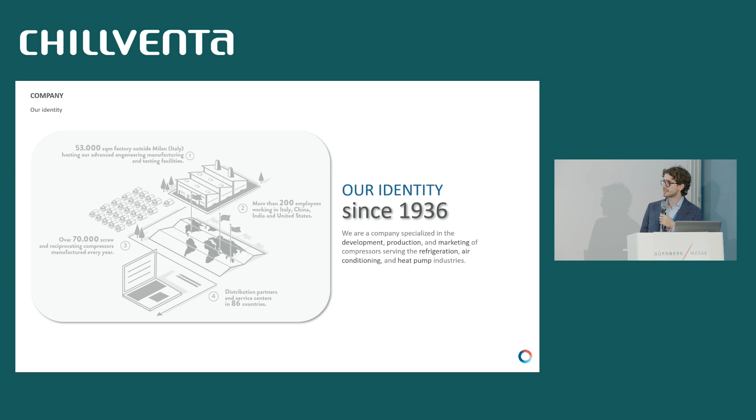We are Frascold, we are compressor manufacturers. We are not only a supplier, but we are also trying to share our experience with customers in the entire customer journey, from the very beginning with the selection of the refrigerant, which nowadays is a big topic, to the very end of the journey.

We have many locations around the world. We try to be where you need us. So we have production facilities not only in Italy, where we have our headquarters, but also in China, an assembly facility in India, and many sales facilities around the world, in the USA, and a new one also in Vietnam.

What is the situation now? In Europe, we are a little bit ahead regarding regulation. We have seen a couple of years ago with the Green Deal this very ambitious goal of net zero by 2050, decarbonizing Europe, with an intermediate target of 55% reduction by 2030. These are very strong commitments from Europe, and it's not easy to reach these limits without proper incentives from policymakers.

At the beginning of this year, they finally took a decision about F-gases, with a strong phase down starting from 2025 and a complete phase out by 2050. And there is also strict regulation about export, so it's not only for our market, but also for export outside Europe.

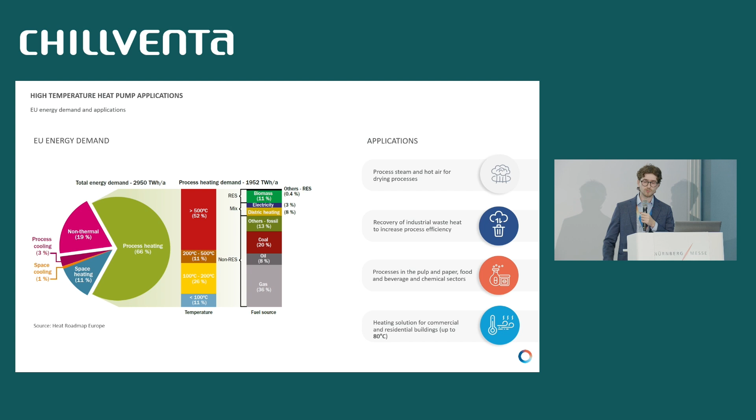So we need to reach in this old residential building the same temperature you reach with the gas boiler with a heat pump. So it's very interesting, this application with propane up to 80 degrees Celsius.

This is a brief overview of the entire range we are developing. We have already developed for the high temperature application. There is a shift from reciprocating to screw compressor based on the size and the capacity that you need. So starting from reciprocating compressor, small reciprocating with 4 cylinders up to 8 cylinders, and switching to screw compressors for displacement up to almost 1,000 cubic meters per hour.

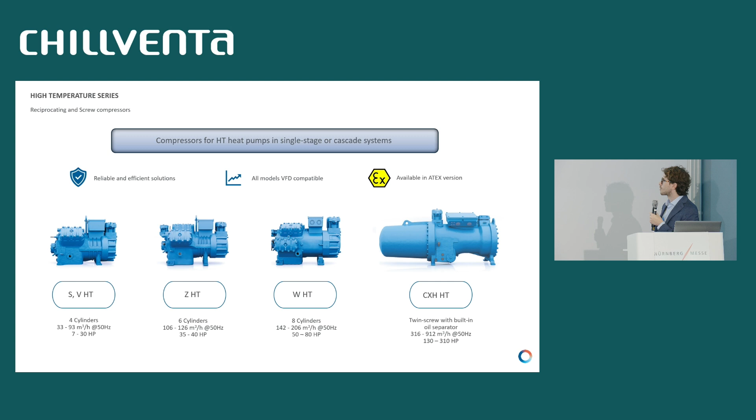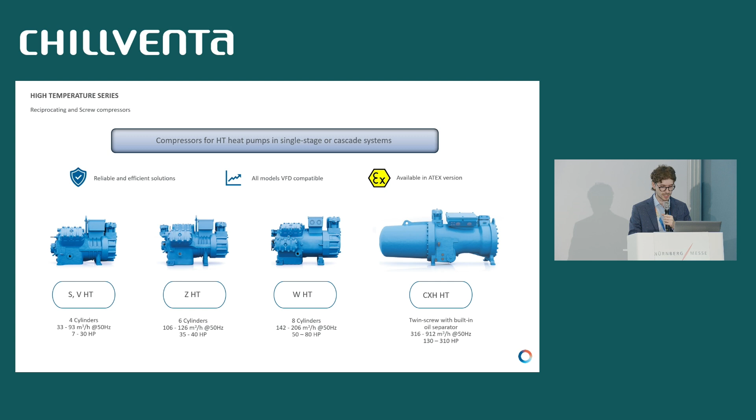So propane up to 65 degrees Celsius leaving fluid temperature, and isobutane, ZD, and special mixtures between hydrocarbons. And what we have now is something even higher, with propane up to 80 degrees Celsius delivering water temperature. Even higher. This is the official limit, but we are still testing above these limits. Isobutane application up to 110 degrees Celsius.

More using different kinds of refrigerant, basically to keep the same pressures as the others. So up to 130 and 140 with isopentane and ZD. This is very interesting because ZD is A1. So for those who are a little bit afraid of flammability, this is a good solution. We don't know in Europe, maybe outside Europe; in the next few years we need to understand if in Europe it could be a feasible solution.

What we have done to reach these new levels, we have modified many of the internal components of the compressor, without changing the shape, because we want to reach these new limits without changing the body of the compressor. We want just to change the compressor without bothering you with system modifications because of bigger components. So what we have changed is everything inside the compressor.

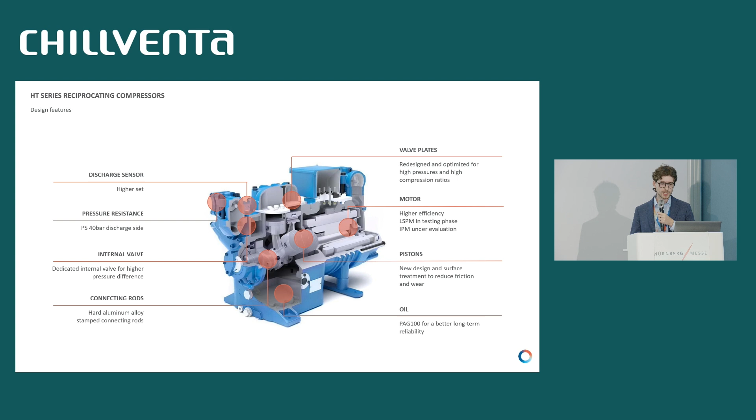We have also changed the standard oil with the objective to withstand this very harsh, burdensome condition due to the high discharge temperature, but also the high pressure. We'll go very quickly. You can find these envelopes already released in our selection software. It's up to 35 degrees Celsius evaporating temperature, and 80 degrees Celsius is the one released; we have tested even more.

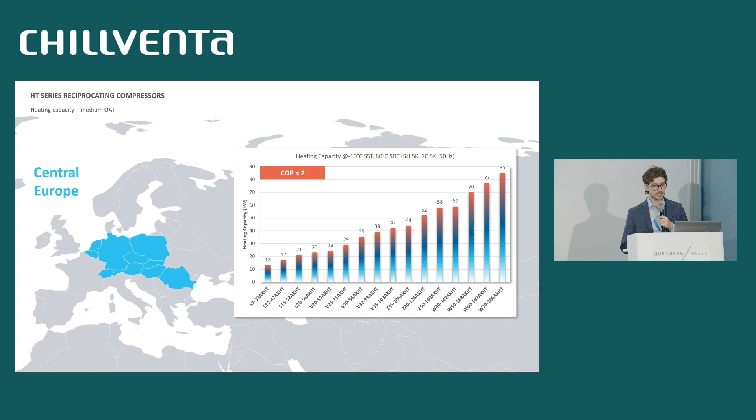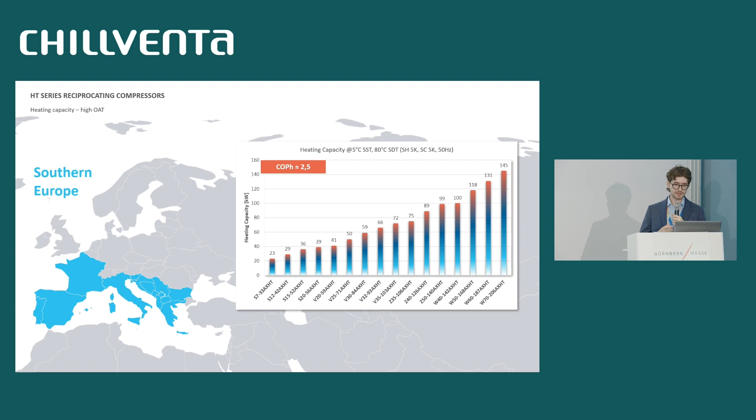This is just to have a reference of the capacities that we can reach, and the COP target with our high temperature series based on the climate. So in Northern Europe, maybe you are more interested in very low outside air temperature, so we can imagine evaporating temperature down to -25. In Central Europe, for example Germany, maybe we are interested in dimensioning with -10 evaporating temperature because of higher outside air temperature. And in Italy, Spain, all these countries with slightly higher outside temperature, 5 degrees Celsius, with the target COP and heating capacity we can obtain.

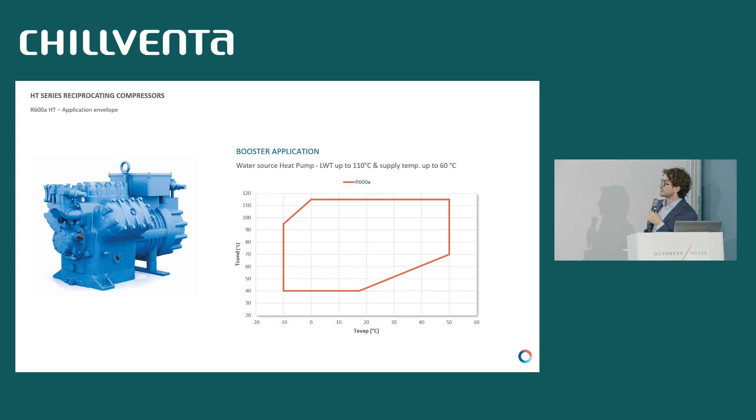And this is a further extension. What we have seen before was the previous limit of isobutane. So if we use this high temperature series, we can extend the previous limit of isobutane up to 115 degrees Celsius condensing temperature and 50 degrees Celsius evaporating temperature. So there are special applications with a very high heating source temperature. But it's very interesting, and there is a lot of demand related to this application.

Switching to screw compressor. In this case, we are interested in even higher capacity. Again, what we had until a couple of years ago was a screw compressor for propane, for example, to deliver water up to 55 degrees Celsius, and isobutane, ZE, HC blends, also in this case up to 90. We are developing a new compressor for higher temperature with propane to achieve more or less 65 degrees Celsius leaving fluid temperature. What is interesting here is that there is a lot of demand for reversible heat pump application in which they want to reach very high efficiency both in heating and in cooling.

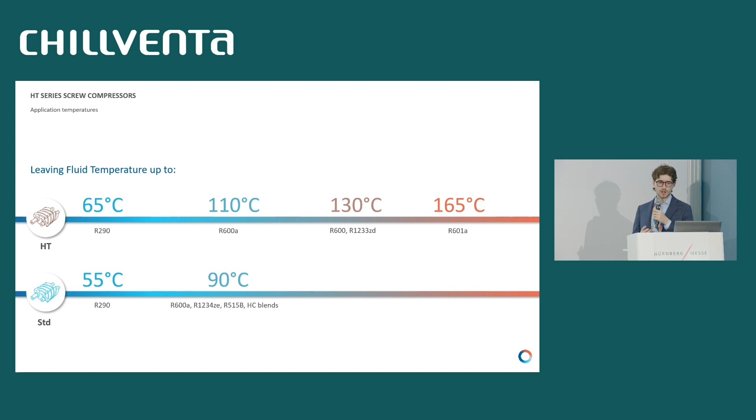So we have developed this solution with a variable built-in ratio to optimize the efficiency in both conditions, heating and cooling. Again, we have similar limits considering higher temperature with isobutane, also in this case 110. Butane or ZD, similar application envelope, up to 130, and even higher, the one that I mentioned before, up to 165 leaving fluid temperature. So the condensing temperature is even higher.

Again, many modifications. I don't want to go through all details. What you need to know, we have developed, tested and validated a lot of new components. The first point for this development was the reliability, because we cannot provide a solution for this new high temperature application without being sure of the reliability of the component that we are providing. So reliability first, efficiency second, but at the same level of importance.

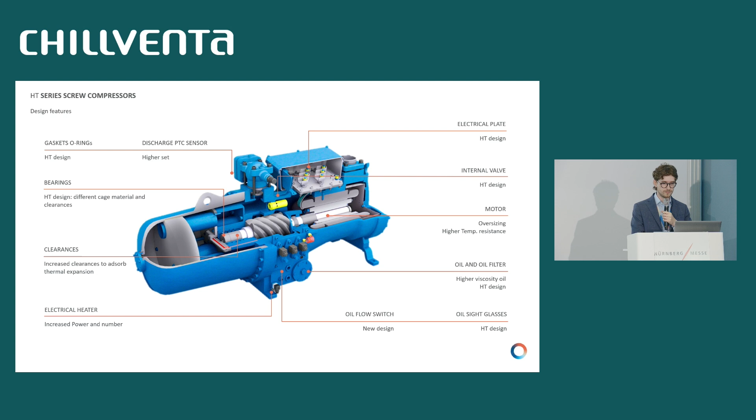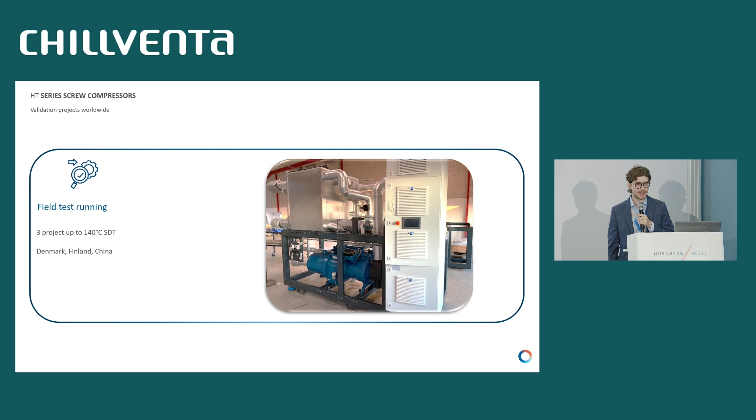These are just to give you an overview of what we have in field test. What I presented is not only theoretical evaluation. We have many field tests, and what we are seeing is an increase in demand related to this high temperature application, mainly for this level, because above 150 many customers would like to have this application, but are a little bit afraid now. So up to 150, we see many applications. We have more than 3 projects now, both with hydrocarbons and HFOs. HFOs mainly outside Europe.

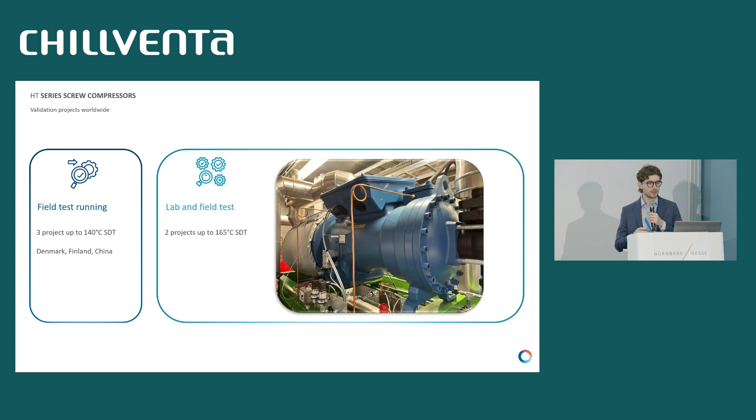And we are also collaborating with technical institutes for the projects above 150 that require a different design. So as you increase the temperature, as you can expect, there are different design solutions. To give you an idea, to reach 150 degrees Celsius, around 20 components need to be modified to reach this level. Maybe around 35 components, different components specifically designed for this temperature level.

And we are in a design phase for the very, very high temperature, because of course it is not an immediate implementation. This is why we are collaborating also with technical institutes to validate the solution and deliver it fully tested, fully validated in a safe environment, let me say. And we expect to finish this field test within 2024, maybe the beginning of 2025, and release the next year the series with these high temperature fluids.

So we have seen a big question mark related to regulation, even if now with the F-gas we are more certain about the future. We don't know outside Europe. What I like to say is that not only Europe should go in a certain direction; we would like to bring also the other countries so that we are all aligned in the same direction. There is a huge demand of heat pumps for this high temperature application, process heating, industrial sector, space heating, also residential sector. We have seen commercial sector.

So there are a lot of opportunities in this market, this is why we are focusing a lot in this sector. We have developed this dedicated high temperature series, not only propane, because now propane is the main refrigerant in the demand of everybody, but we have also other solutions, not only with hydrocarbons, with natural refrigerants, but also with HFOs. And it's very, very interesting, this application over 160. We will not see it, I think, in a few years, but maybe it's a medium-term project. But it's really interesting, and we have the solution. We are developing this solution.